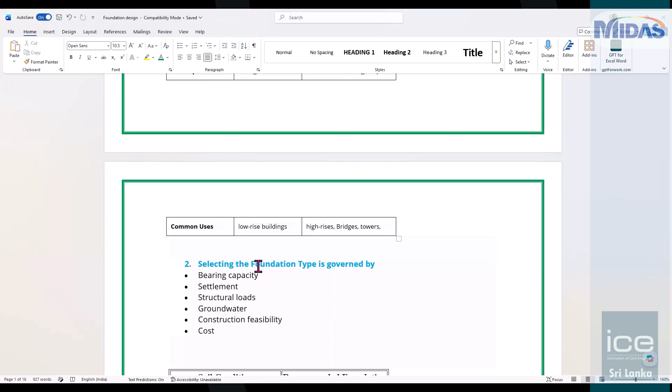Now, second part is selecting the foundation type. Which foundation do we need to select? Again, it depends upon the bearing capacity of the soil and the settlement criterias, the structural loads coming from the superstructure, the presence of the groundwater level, construction feasibility, as well as the cost. All these parameters govern selecting the foundation type.

Based upon the soil conditions, if you're having high soil bearing capacity and low settlement criteria, we can happily go with isolated foundations. If our two columns are very closely spaced such that the isolated foundations are overlapping, we can go with combined foundations. If you're having low soil bearing capacity with many columns, raft foundation will be the suitable option. If you're having weak upper soil layers, we go for pile foundations or the bored pile foundation. And if you're having heavy structures or high-rise buildings, we go for pile raft foundation.

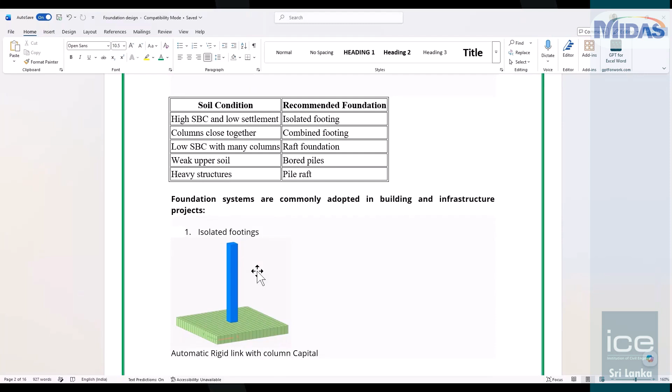So when it comes to the foundation systems commonly adopted in buildings and infrastructure projects, we basically start with isolated foundations. For isolated foundations, we can model them separately, or we can also model them in the global structure.

So now, what is the advantage we can get when we model the foundations in the global structure? You can just type in the chat box. Do we have any advantages when we model the foundations along with the superstructure?

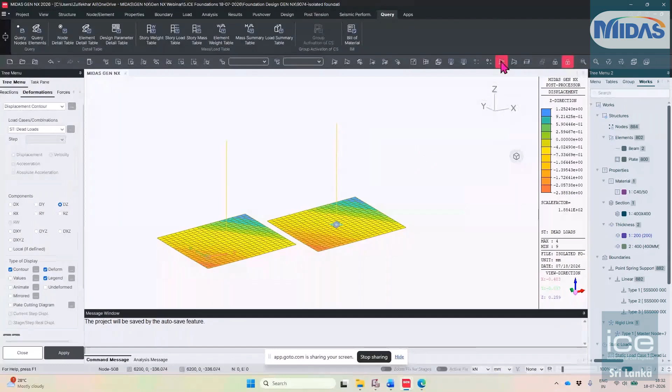So this is one example of isolated foundations that we have modeled. Basically in engineering practice, we model the supports, do the analysis of the structure, extract the reactions, and then design the foundation separately. But what is actually happening at the site, or the practical scenario, when your building is resting on the foundations? If you see this particular structure, you have a column and below that it is modeled as an isolated foundation.

One thing is we give the real soil flexibility under the structure. In the boundary conditions, we have different types of support conditions. Generally we provide pin support or fixed supports at the bottom of the column, which will give zero deformation at the bottom after the analysis.

But when we model the shell element as an isolated foundation, we apply surface springs. In surface springs, we can provide the modulus of subgrade reaction in all three directions. There will be certain resistance for the soil in the vertical direction by compression behavior, and some resistance in the lateral directions, global X and global Y. So we can enter the modulus of subgrade reactions provided in the geotechnical report in all three directions and apply it to this particular foundation.

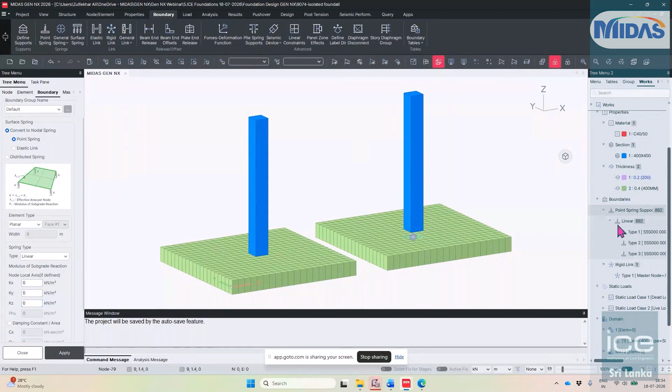Where these points can be seen here. So now, after running the analysis, when you go to the results and check the displacement contour for any load case along the vertical direction DZ, along with the deformed shape and the values, I'll just undisplay these supports.

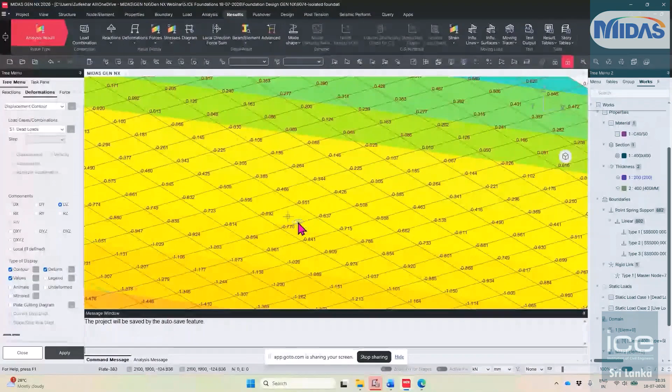And now I can change the units dynamically here to mm. Now I can see the deformation or displacement contour at the bottom of the column, which is around 0.692 mm. Here it is a single column and the load applied is also very low intensity. But when it comes to the building, your axial loads and moments will be higher, which will increase the magnitude of this deformation at the bottom of the column.

But when we give the pin supports or fixed supports, it will show us zero deformation. But actually, there is a deformation happening at the bottom of the column, which we ignore by modeling the point pin support. So what happens here is you'll be getting some additional forces and moments due to settlements happening in the foundation. That effect can be captured when you model the foundation along with the superstructure. So this is the first advantage of modeling the foundations along with the superstructure in the same model file.

Second thing is you can also check the stability criteria. Whenever we are doing the foundations, we have soil bearing checks, overturning or uplift checks, and sliding checks. When we apply these surface springs, we can also see the soil pressure, the vertical pressure, and the legend. So I can just change this to fixed format here, and change the units to kilonewton per meter square.

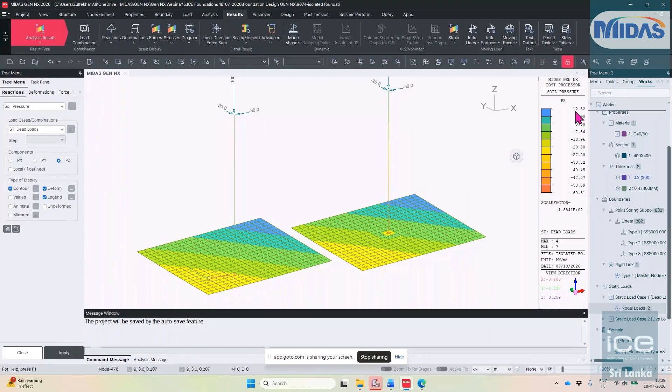The second thing is whenever we are modeling foundations, your columns are modeled as line elements and foundations are modeled as plate elements. So when your line element is directly contacted to the plate element, you get more stress concentration, which gives a large amount of reinforcement at the connection region. But in reality, this part of the foundation is completely rigid - the column and foundation are completely rigid.

So in order to avoid that huge stress concentration, we can model a rigid link based upon the size of the column. This can be done easily in the software with the help of column capital.

If you go to the node and element tab, there you can find different options like drop panels and column capitals. First we can define a column capital, which is having the size of the column, let's say 0.4 by 0.4.

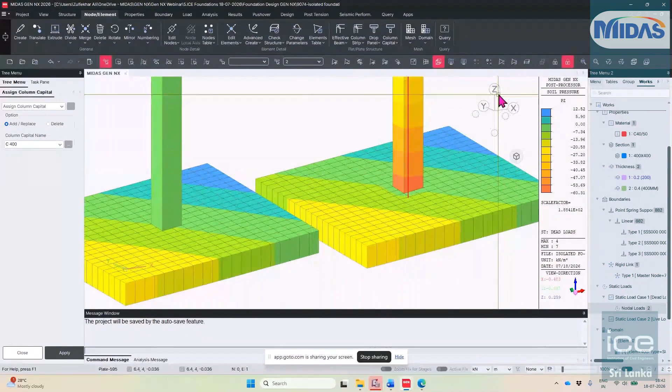Now you can see after meshing, the software will create the rigid link based upon the size of the column - this entire part is treated as rigid. Now let's see how it impacts the analysis results. After performing the analysis, I will go to the results and check the plate forces and moments.

Here we can select the load cases, static load cases, as well as dead loads and live loads. We can also smoothen the forces by selecting the average nodal method, where we take the average of the connected elements at a common node.

Mxx is the moment along the local x-axis. We can display the element local axis and the label - so this is our local x direction, and mxx is moment along the local x. We scroll down, don't want the deformed shape and legend, and just hit apply.

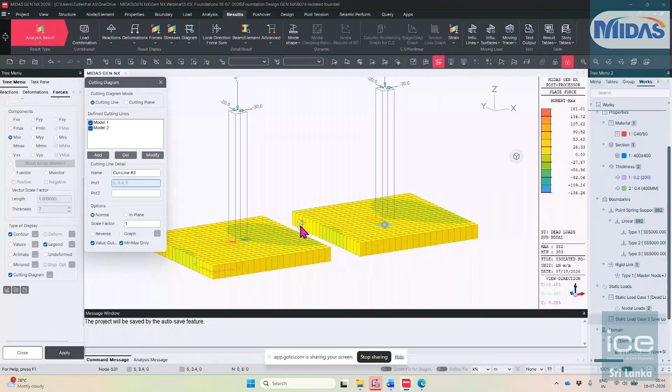So now here you can see the difference in results when you model the column directly connecting to the plate elements versus with the help of rigid link. This is the moment at the face of the column - that is 51.6 kilonewton meter per meter, and here is the peak moment at 161.8 kilonewton meter per meter. So that is where we observe the peak moments when we model the line elements directly in contact with the plate element.

So it is good practice to model a rigid zone below the column, wherever it is, at least the cross-sectional area which has that particular rigid link. Manually creating those rigid links is a complex job, but in MIDAS Gen you can do it very easily just by defining the column capitals and automation, so you will be getting lesser reinforcement in the foundation.

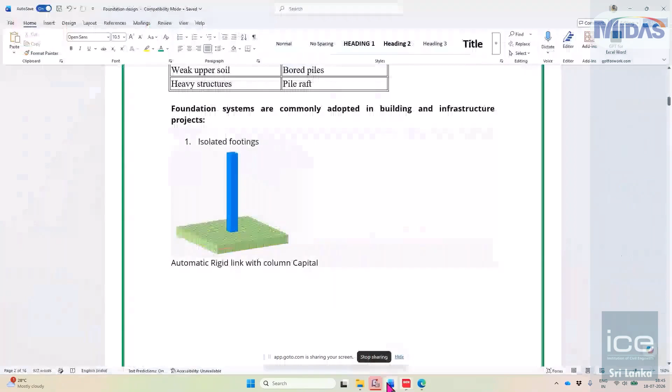So these are the few things when we come with the foundations in a single model file. We can see the global behavior, and the second thing is automatic rigid links with the help of column capital, which will reduce the peak moment.

So before modeling the shell elements, now the question is how to decide the size of the foundation. There are many columns in a building, so how to decide the size of the foundation? Just type in the chat box.

Am I audible? And am I audible? Yes, sir. Okay, so I have one question for the attendees: how are you going to decide the

size of the foundations before modeling it as a shell element. So few may do manual calculations using the Excel sheet by exporting all the reactions to the Excel sheet, which is again a time consuming process. Yes, based upon the load and the SBC. So we export all the loads to the Excel sheet and make sure that the stress criteria is satisfied. And from there, we also consider the bearing capacity of the soil, and then we finalize the size of the footing.

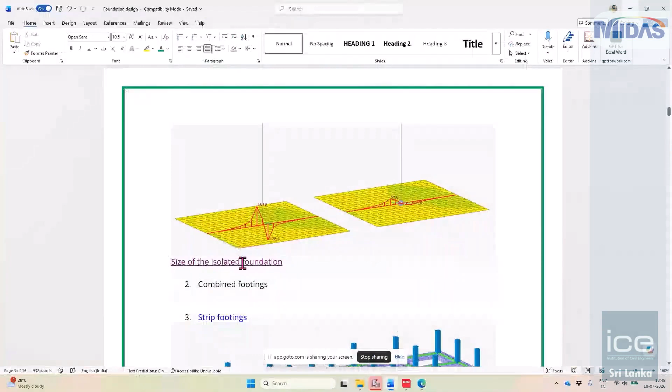So basically, in the software, we can do the superstructure as well as the substructure in the same model file, and we can also automatically generate the load combinations, or we can also replace the existing load combinations if there are any modifications in the load cases. So generating the load combinations is automatic in the software.

And now we can see a part of the building is on pile raft foundations and part of the building is on the isolated foundation. So I want to know what are the sizes of the foundations based upon the load and the soil bearing capacity. So in MIDAS Gen, we have an interesting tool called Design Plus, where it will help us in providing the sizing of the RC members, either it may be beam, column, or the foundation.

So we can link with MIDAS Gen and extract all the reactions required for the design. We can link these to Gen and import all the data, either it can be isolated footing or combined footing. And here we can also select by maximum or individual members, and for load combination type, we can select all the load combinations and force type as reactions of the support.

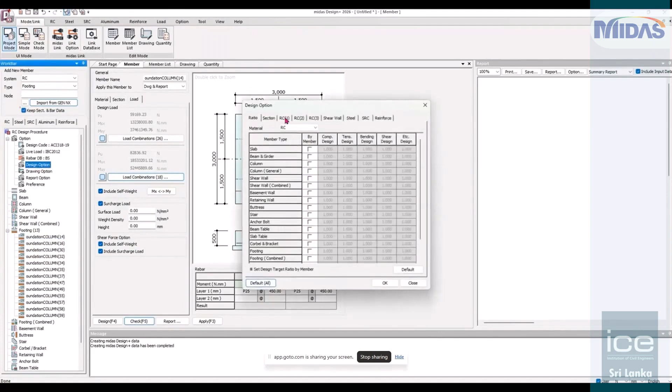So here you can see strength and serviceability load combinations, and we can also include some additional surcharge load. Here we can also restrict the maximum thickness of the foundation required for the design, and we can also set the rebar limits as well, so what should be the range of my rebar for the footing. And we can also specify the spacing of the rebars required for the movement.

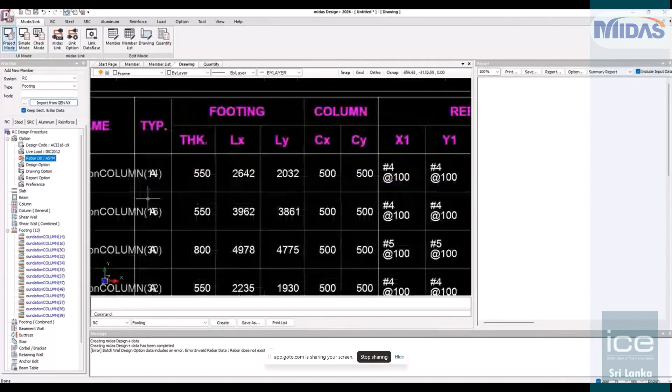So here we can find both the options, design and check, and if you want to design all the foundations, we can design in a single go. So before doing the design, we can make sure of the soil bearing capacity. By default, it will be 3 meters by 3 meters, but now you can see the optimum size of the footing required based upon the loads and the bearing capacity.

So you can also generate the drawings for the footings and extract the quantity of the steel as well as the concrete for the foundations. So this is how the Design Plus tool helps in providing the sizing of the foundation, generating the drawings, and the quantity of the steel and concrete. And another interesting part is you can extract the report in the detailed format.

So here we can see the reports can be either in detailed format in Word document or Excel or the text file.

Similarly, based upon the Eurocode, we can also do the strip foundation designs, combined foundation designs in Design Plus based upon the empirical calculations.

And for detailed finite element designs, we can model it as a shell element and do the design in the software. We have a mesh design feature where we can select the Eurocode, and here we can do the slab flexure design, shear design, and serviceability checks.

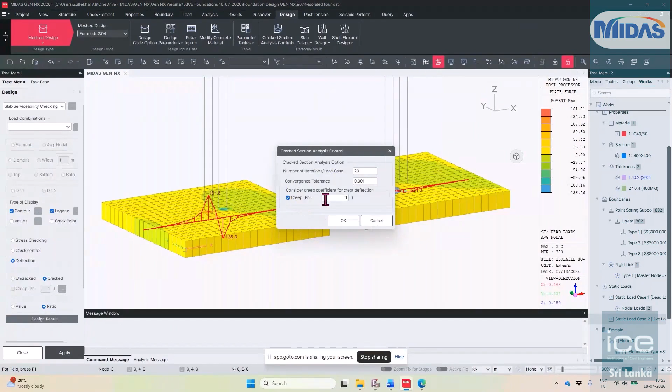So this is how you can do the detailed designs for the isolated foundations once you get the sizing of the foundation. Design Plus makes our job easier in the foundation design.

Next one is the combined footings. The same concept of the foundations is similar now, like boundary conditions. In combined footings, footings are combined with each other.

So here we can see these are the combined footings which are modeled, where you have two columns and the foundations.

We can also do the foundation designs in Design Plus as well, based upon the empirical methods or the procedure given in the code.

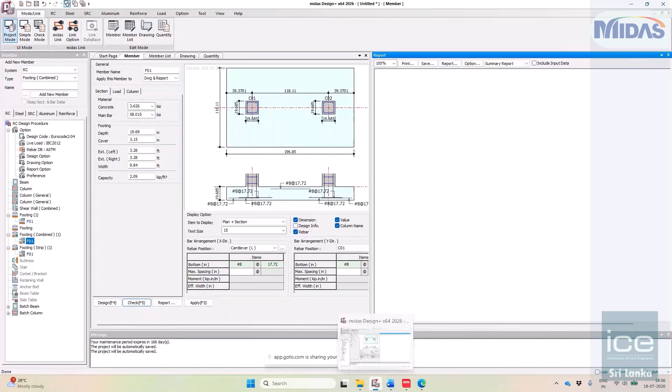Next one is the strip foundations. Sometimes along with the foundations, we also need to strengthen with the help of beams, additional beams. So in the software, we can also model the strip foundations in the global model.

So when I activate it all, this is my global model where I can model the strip foundations and see the realistic behavior of the structure and additional strength due to these particular beams.

So when these foundations are not satisfying the criteria, we start with isolated, then we go for combined strip, and then we go for the raft foundation.

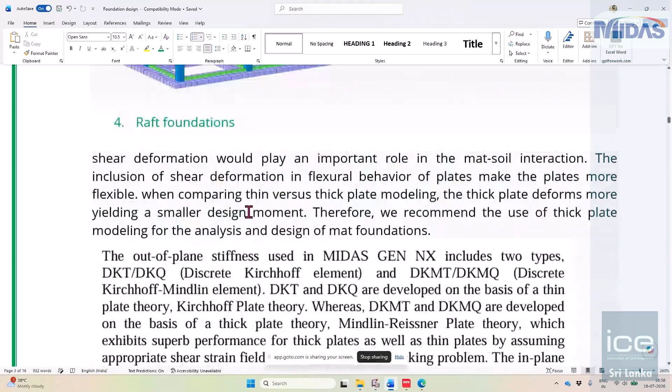So whenever it is coming to the raft foundations, there are few interesting things. First is the shear deformation.

Shear deformation plays an important role in soil structure interaction, particularly the mat soil interaction. Generally we ignore the shear deformations, but shear deformations play a major role in the flexure behavior of the plate, which makes the plates more flexible.

So when your structure is flexible, the moment and force demand will be lesser. But when it comes to the serviceability point of view, the deflections will be higher. So we need to balance both things.

So when comparing thin versus thick plate modeling, thick plate deforms more, yielding a smaller design moment. So therefore, generally we recommend using the thick plate modeling for the analysis and design of the mat foundation.

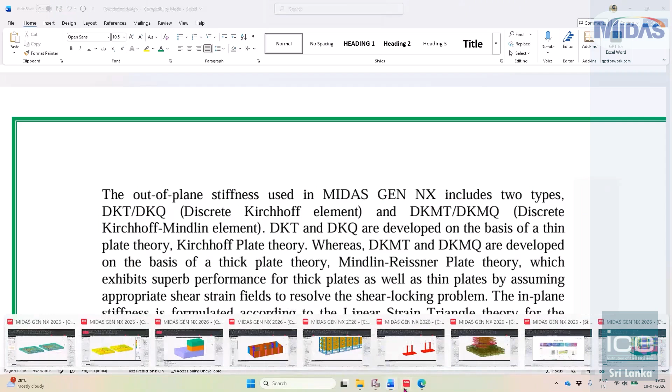So in order to avoid these peak moments, we generally use column capitals for creating the rigid link. Otherwise, at this location, we will be getting higher reinforcement.

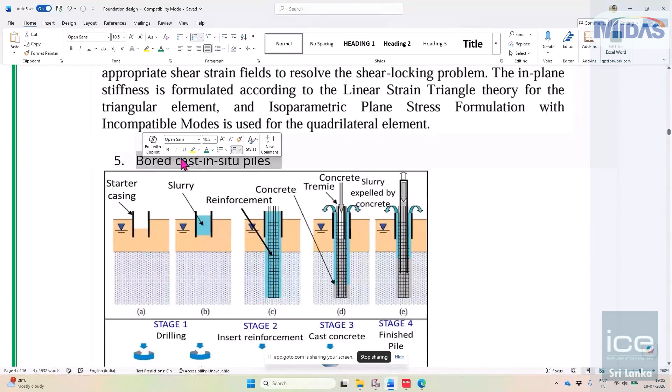So if the raft foundation still isn't solving our concern, then we go for the pile foundations. The pile foundations will depend upon different construction sequences.

We can drill it and then insert the reinforcement cage and then pour the concrete. But every construction method has its own advantages and disadvantages.

So when you drill this particular pile and insert the reinforcement cage, there may be a chance of collapse of the soil and concrete, and there will not be complete compaction or bond between the reinforcement and the concrete.

So in that case, we go for the driven piles or precast piles. The advantage of these precast driven piles is that we have high quality concrete due to controlled manufacturing, and we get immediate load carrying capacity after the installation.

So we need not wait for the concrete to gain complete strength or for curing. And there is no risk of borehole collapse.

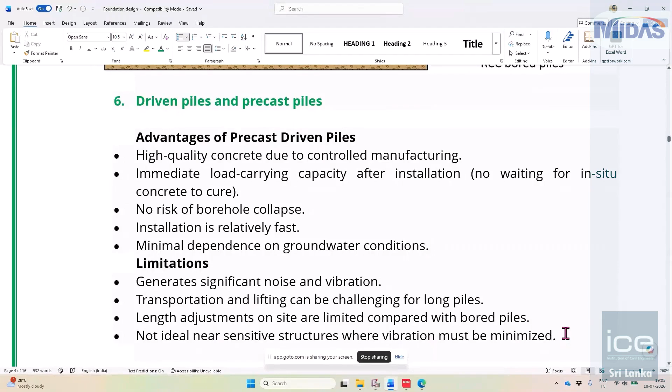So now these piles are combined with a raft, either as isolated pile cap foundations or pile raft foundations.

But whenever you create pile foundations, along the depth of the pile there are different soil layers, either lower density, medium density, or higher density soil. So we need to perform the borehole test and extract the soil data along the depth of the pile, and based upon that, calculate the stiffness of the soil.

As we know, soil has non-linear behavior, so along with the deformation, the stiffness will gradually reduce. Either we can provide equivalent linear stiffness, or model it as a force deformation function using the PY curves. So the boundary conditions for the piles will be these force deformation functions, which we need to calculate.

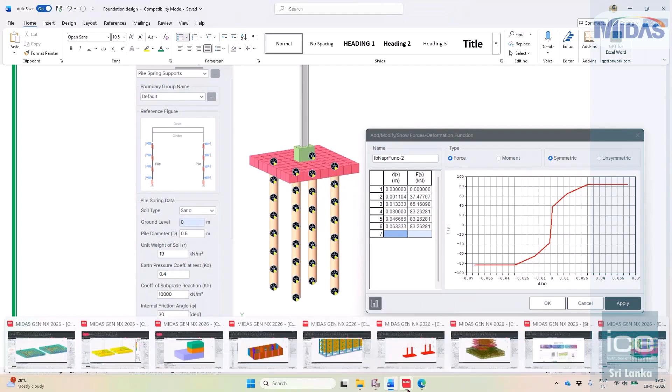So in the software, we have a direct option of providing the pile spring support where we can just input the geotechnical data, like what type of soil is available at the site. So when we go to the boundary conditions...

Here we can find the pile spring supports where you can select the soil type, whether sand, soft clay, or stiff clay, and the ground level of the pile, the pile diameter, and the unit weight of the soil present at this particular location.

And if I see from the side view, along the depth of the pile the properties may change. As you can see in this diagram, up to this part of the pile you have lower density, and again this part of the pile you have medium density.

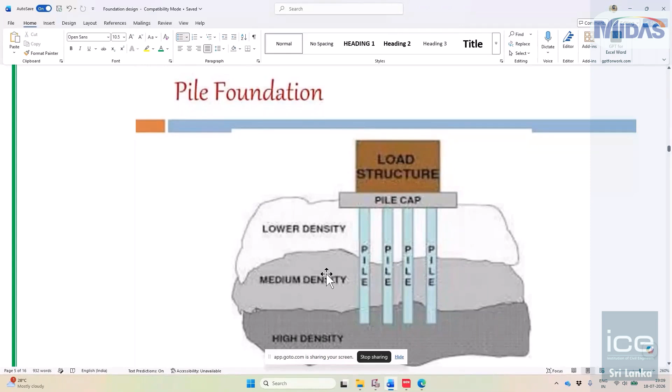So what we can do is select piles which have the same soil properties and assign the spring. Then you can change the parameters here, select the other layer of pile elements, and apply. Once applied, you can see all the inputs in the tree menu.

So again, this is an iterative method. First we assign some springs, then we run the analysis, check the results, and make modifications to the springs until the results converge.

So this we can do with the help of empirical calculation. For example, we have our own set of calculations for finding the PY curves. So instead of defining these functions one by one, going to the force deformation functions and adding them manually, we can automate the process with the help of API.

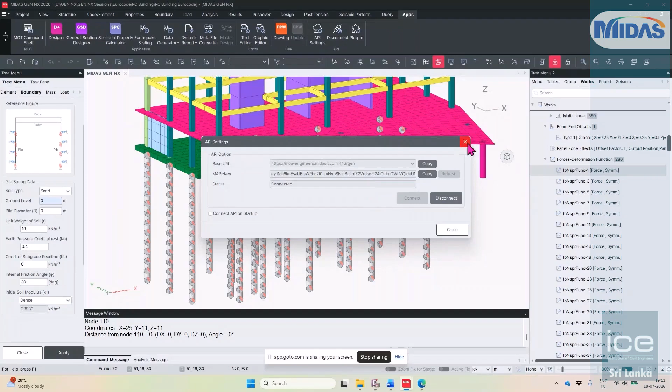So for that, we have developed a tool which is PY Curves Automated.

So what exactly this tool does is, let's say we have a building with the pile caps that are already created, and now we need to create the pile and apply the springs. So here we can directly input or link all the PY curves in the Excel sheet for the force deformation functions, and we can have the reference nodes here for the piles, and we can specify the reference node, the metadata, and the section IDs.

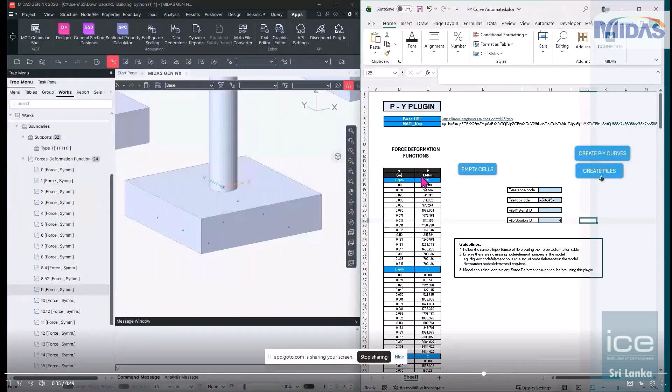So here you can see the workspace menu. In the boundary conditions, right now we have only the support. So once I click on create PY curve, it will create all the force deformation functions as per the data given in the Excel sheet. And once I hit on create piles, it will create the piles and apply the multilinear springs. So this is how we can make things faster with the help of API.

So automation will make our work simpler. Till now we have seen line modeling as well as the plate elements. But when you go for heavy foundations like machine foundations or very deep rafts, in that case we use solid elements for the modeling. Like machine foundations or raft foundations which are having very huge thickness, we generally use the solid elements.

But whenever we model the solid elements, how will we extract the forces? So my question is, when we model the solid elements, how do we extract the forces? Like, if you are modeling the solid elements, how to extract the forces.

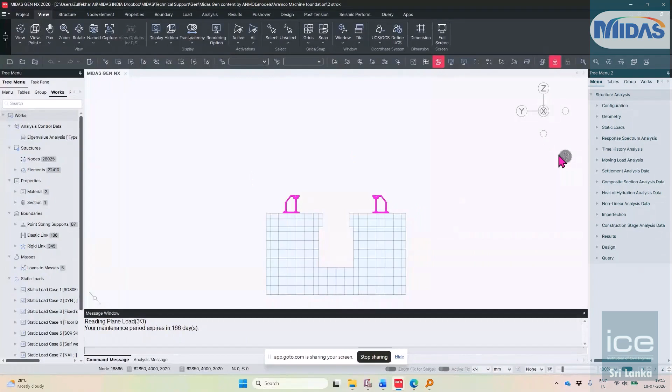So let's say this is one example of a machine foundation where you'll have the solid, and you can also see the depth of these particular foundations with the help of the query nodes option, which is 4.5 meters. And the length of this foundation is around 141 meters.

And here we will perform the dynamic analysis for the check of the foundations. So here we will be having the heavy machine foundations and apply the dynamic nodal loads onto that particular foundation. And the time forcing functions will be periodic, reaching a maximum amplitude of 8,000 kilonewtons.

So after performing the analysis, we can see the stresses for the solid elements, whether the tensile stresses and compressive stresses are within the permissible limit or not. So this is one check, and the other is extracting the forces and moments for the solid elements, which can be done with the help of local direction force sum.

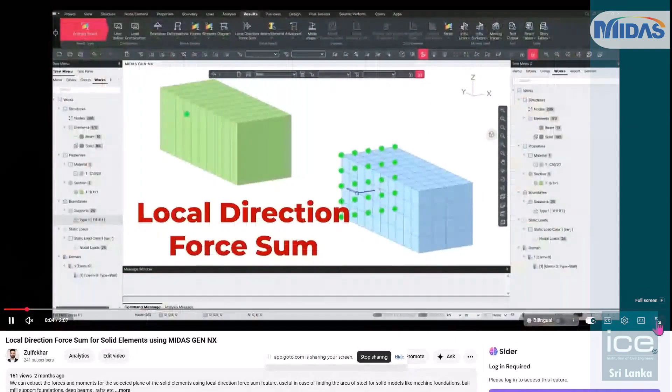So here we have modeled two different elements. One is the line element and the other is the solid element. This is a simple cantilever beam just to verify the results, which is subjected to a nodal load at the free end. Because of that load, we are getting a moment of 625 kilonewton meter and a shear force of 250 kilonewton.

So whenever we model the same thing as a solid element and we want to extract the force and moments, we can use this local direction force sum feature for the solid elements. In the results, you can find this local direction force sum, select the type of element as solid, and cut a section where exactly we want to see the forces.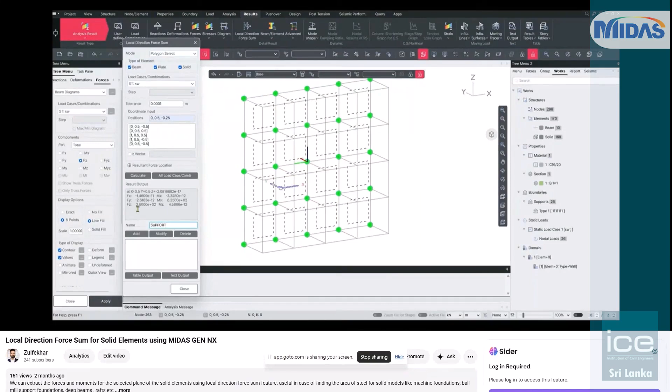So we can directly see the results here, or we can also give a name to that particular section and extract the results in tabular format. So I have given the name as support and extracted the results in the table for all the load cases or combinations.

So now you can see we are getting the same forces and moments that we got for a line element, with a moment of 625 kilonewton meter. So this is how we can extract the forces in solid elements when we are dealing with solid foundations which are having large depths.

So another challenge that we get when modeling such deep foundations is the heat of hydration. You know that concrete follows an exothermic reaction where it releases heat when it is gaining strength.

So if you see these particular foundations, the outer surface is exposed to the temperature atmosphere, so it will release the heat very easily. But if you go to the inner parts of this particular block foundation, it will generate additional stresses. So once the stresses are increased, it will try to generate cracks.

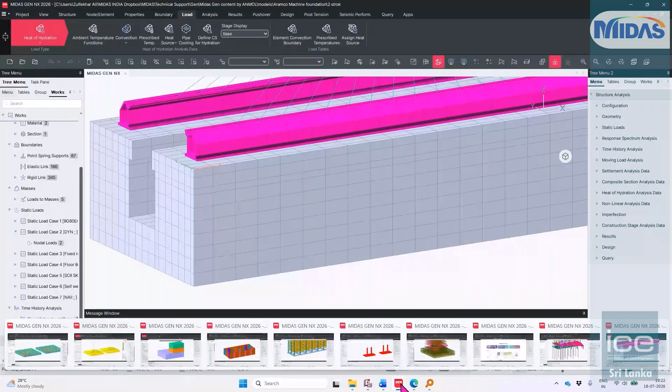Let me show you one simple example of the foundation. This foundation is completely modeled as a solid, and we have two different materials: one is the mat foundation, and the other is the subsoil. For subsoil, we have given the soil properties, and for the mat, we have provided the concrete properties. And then we include the time-dependent material properties.

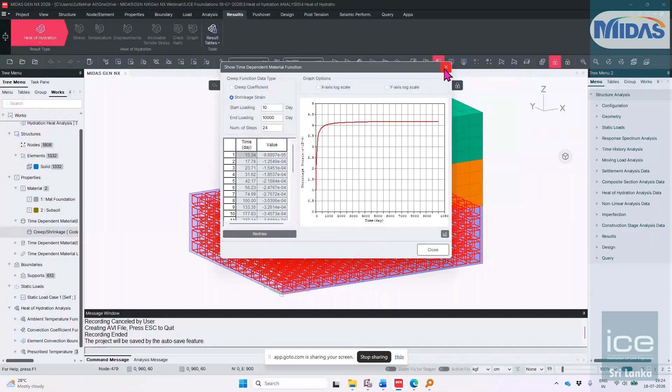So here you can select the code, like European code, and define properties like characteristic compressive strength and notional size, class of cement that you are using, and code. Based upon that, the software will calculate the creep coefficient variation with respect to time and the shrinkage strain variation with respect to time. So these are the few important things that we need to consider when dealing with concrete structures: the creep and shrinkage effects, and the elasticity variation with respect to time.

Then we apply the boundary conditions. So here we'll be having the entire soil, and then we provide the ambient temperature - what is the normal temperature. And then we have the convection coefficients, based upon the exposure of this particular concrete, how much heat it can release. Based upon that, we provide the boundaries.

So if I display these convection boundaries, so here it is, open to the atmosphere.

And then we will be having the heat source functions, like how heat is generated in the concrete with respect to time. So we have a function with respect to time, which is a function of maximum adiabatic temperature and reactive velocity coefficient. Sometimes these heat source functions may change based upon the concrete data we're using - based upon the cement type, moderate or high early strength, blast furnace or fly ash, and the temperature, and based upon the cement content, the graph of the heat source function will vary. So the complete results will depend upon how the heat source is developed.

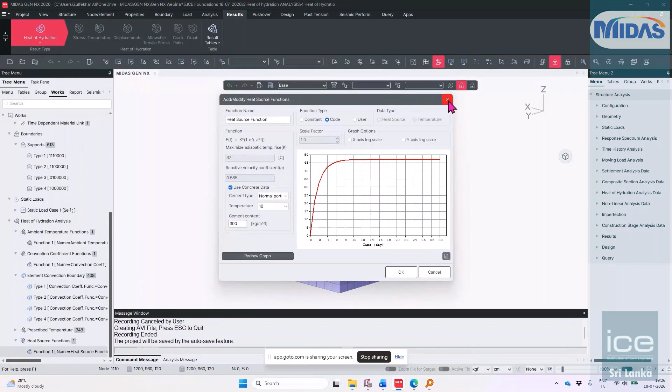And these particular blocks represent pouring of the concrete taken in different stages. So let's say in the first stage, only this part of the concrete is poured, and then we take a break, and then a second pour of concrete takes place. So this is how the sequence of pouring concrete can be simulated in the software.

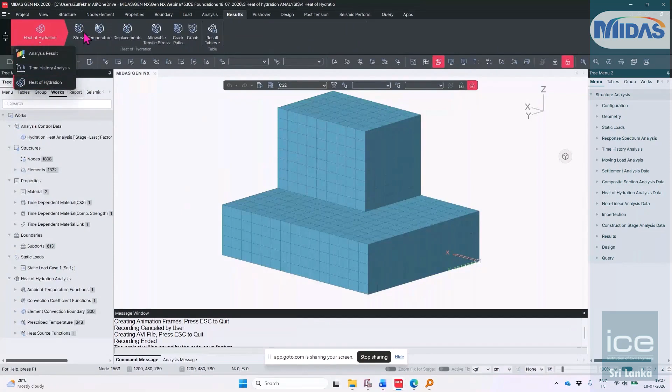And after performing the analysis, we can see all the heat of hydration related results, like how the stresses are developed in the concrete with respect to time. I can see the stresses - so here it is, 1.48. A positive value represents tensile stresses, and a negative value represents compressive stresses.

So if these stress values increase beyond the permissible limit, then cracks will be developed. After 200 hours, the stress is 1.64, and after 220 hours, it is 1.88. So the stress value is gradually increasing - 2.06, 2.02. After a certain peak, the stresses will come back to normal - it will go to the peak level and then try to reduce. So we need to make sure that at that particular peak level, our concrete is safe from cracking.

And you can also see the temperature variation. So you can see the temperature is varying till 52 degrees Celsius, and after 1100 hours, it has gradually reduced to 36. And we can see the allowable tensile stresses and the crack ratios in the structure.

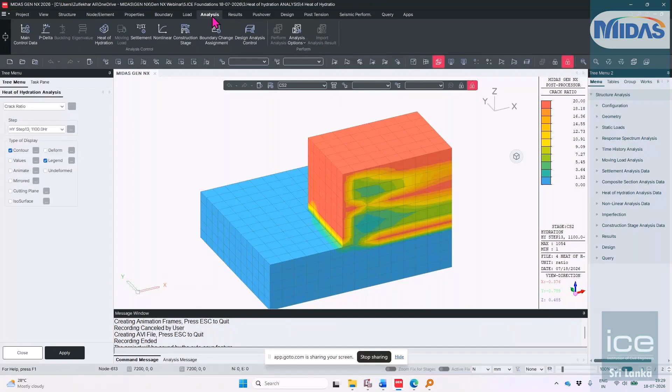So this is one of the important analyses that can be easily handled in Gen NX when you have a mass concreting structure - either raft foundations, wind turbine foundations, or machine foundations. So that can be easily handled with the help of heat of hydration analysis.

So another challenge that we face is related to soil structure interaction. The procedure that we have seen previously is completely based upon empirical methods, finding the P-Y curves and updating the P-Y curves in the model.

But when it comes to the important structures, the realistic approach is by performing the 3D geotechnical analysis by creating the soil in a 3D continuum model.

So if you see here, this particular structure is analyzed and designed by assuming certain springs. Initially, we assume certain force deformation functions, and then we model the exact 3D soil model in the geotechnical software.

So we have geotechnical analysis software known as MIDAS GTS-NX, which is known for advanced geotechnical analysis like soil structure interactions, deep excavations, tunnels, etc. So today we'll focus on the soil structure interaction application, and we have a powerful link with the geotechnical software.

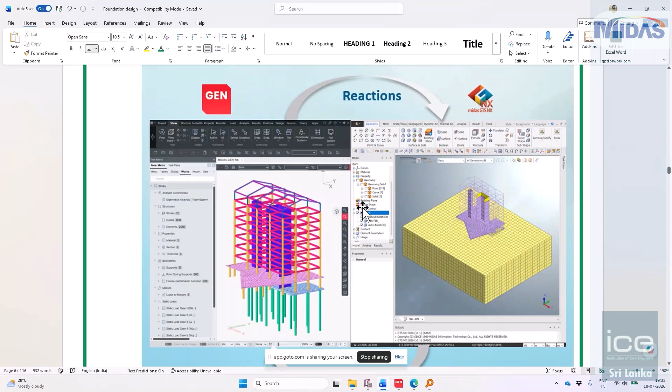But doing this manually is again a little bit time consuming, because we need to wait till the analysis has been done and then export it. So instead of that, we have tried to automate this iterative process with the help of the NX Interact plugin.

So that plugin will automate the process. So even if we don't have the geotechnical software, we can also connect with other clients who have this particular geotechnical tool, and we can do the iterative analysis.

So I will show you a simple example. Before that, these are a few real projects where the soil structure interaction has been done for a high-rise building.

So the global model is done in Gen NX, and in GTS we have modeled the soil based upon the exact profiles. As you can see, the soil is varying along the length and the width of the formation. So this is to handle the soil structure interaction.

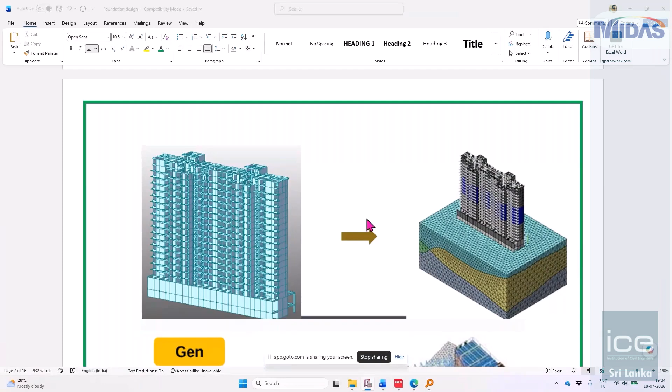So if you see this particular image, there is one more additional challenge. There is already an existing building, and below the existing building there is some tunnel construction.

So now we want to perform the risk assessment for this particular building during the tunnel construction. So here, in the geotechnical analysis software, you can capture the effect on the superstructure because of the tunnel construction.

So another challenge that we frequently face is construction of buildings adjacent to tall structures. So when we do deep excavations, we need to see the behavior of the adjacent structure as well. Such types of challenges can be easily handled by MIDAS GTS NX in combination with MIDAS Gen NX.

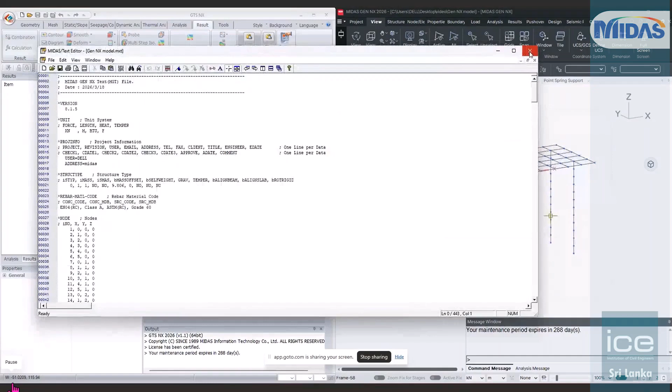So this MXT file will export the geometry of the structure, and we can easily import that structure into the geotechnical software. So this will save a lot of time in creating the model from scratch.

So now you can see the entire model has been imported. And then we just quickly create the soil model by defining the properties of that particular soil. So we have some advanced tools for creating the geometry and meshing. We define the soil properties of Mohr-Coulomb, and we have different material models that are readily available.

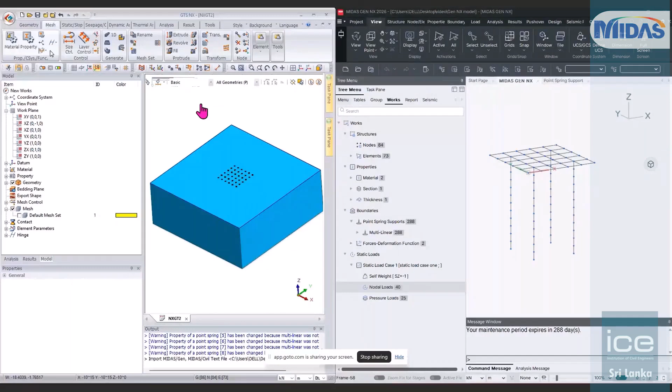And we can also simulate the groundwater level. It also does automatic meshing and applies the boundary conditions. And we perform the analysis to check the soil stiffness and settlement.

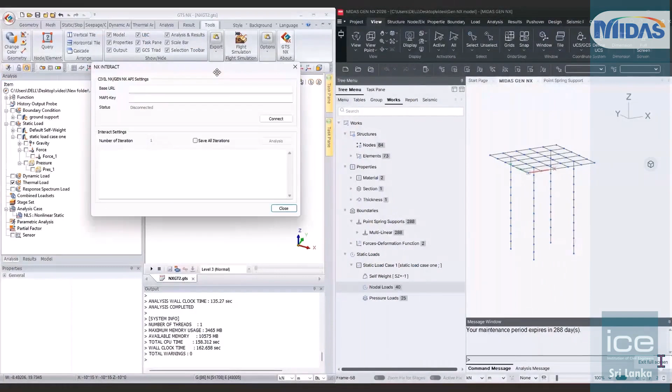So now we get the results related to the settlements. With the help of NX Interact, we can link the Gen software with the help of API. So even if the programs are installed on different computers, you can easily exchange the data. Let's say you have the geotechnical software and I have the structural software GenNX. I can share my MAPI key with you so that you can input the MAPI key in the NX Interact.

You can directly connect the models. So first it will run the analysis in the GTS NX, and then it will send the data to the GenNX automatically with the help of API, and there it will run the analysis and bring the updated nodal results. Based upon the number of iterations we specify, it will do the iteration, so we don't need to worry about when the analysis will be completed or exporting and exchanging the files. You can just put it for analysis and relax.

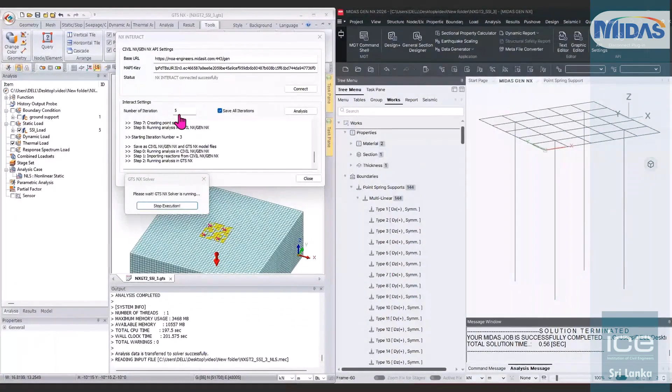Now let us see the practical example using MIDAS Gen NX and GTS NX, especially for the pile raft foundation. This is one of the upcoming tallest towers in the world, Jeddah Tower in Saudi Arabia. The height of the structure is around 1 kilometer, and the structural analysis is done using MIDAS Gen NX by Thornton Tomasetti. You can see the different construction stages for this particular high-rise building.

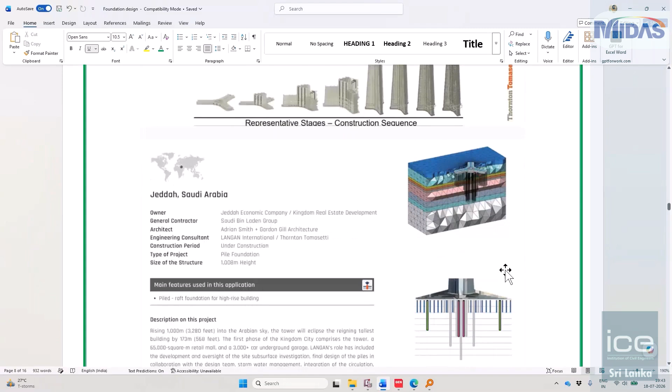When it comes to the foundations, this structure has a pile raft foundation, done using MIDAS GTS NX. The engineering consultant was Langan International for the geotechnical analysis, and Thornton Tomasetti for the structural analysis of the superstructure. It is still under construction, with pile raft foundations, and the height of the structure is 1008 meters. This is the upcoming tallest tower, taller than the Burj Khalifa.

So in this particular project, both the softwares are utilized, Gen as well as GTS. Gen for the column shortening analysis of the tall building, and GTS-NX for the foundation raft analysis. You can see the different soil models.

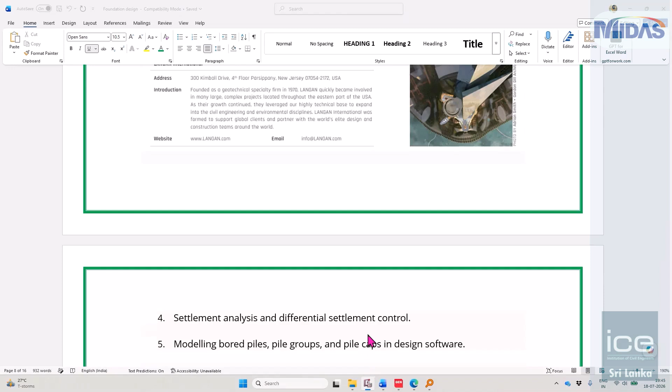So next is the settlement analysis. Settlement is another challenge in the structure. The Leaning Tower of Pisa is one structure affected by differential settlement. To capture the settlements, you need to model the soil as well as the superstructure. Because of the settlements, you also generate some additional forces and moments in the structure. This is one approach to do the detailed settlement analysis, and another approach is we can apply the settlement values directly to the column locations.

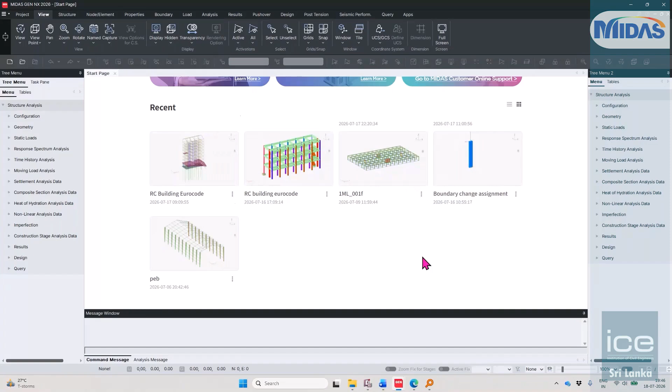So let me just open the model. Yes, audible. My screen is visible, right? Yes, sir, yes, it is easy.

So let's say this is my superstructure where I know the settlement values. We can go to the loads, then to settlement, and specify the settlement group. Here you can select all the nodes of the columns which are having the same settlement. Let's say the highlighted nodes are undergoing 10 mm deformation, and similarly different columns undergo different settlements, so based upon that we can create the groups.

We can also create some load cases where we can capture different effects, like when two different groups settle simultaneously, by doing some permutations and combinations. In this way we can capture the settlement behavior and perform the settlement analysis by providing the settlements at different columns.

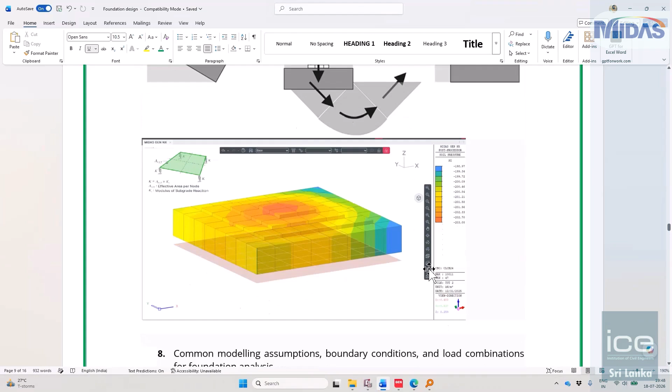So again, we need to check that the structure is safe in stability, bearing, and sliding. We already saw that our structure is complete in compression, or if there is any uplift, or if these values exceed the soil bearing capacity. For the foundations, we refer to Eurocode 1997 for the geotechnical design part. This we already saw in the previous webinar, for load calculations and the concrete design we refer to Eurocode 1992.

So this is where we have discussed about the heat of hydration analysis, where we can define the heat source functions for the concrete and the time-dependent material properties, and then heat transfer. So definition of the ambient temperatures and the heat, and temperature distribution based upon the construction or the pouring sequence. So from there, we can see how the temperature is varying during the construction and the stresses in the concrete.

So we can also use pipe cooling approach to reduce the crack and control of temperature for the use of ice plant by determining initial temperature for newly activated elements at the corresponding construction stages. And we also need to consider the various parameters for the accurate crack index analysis.

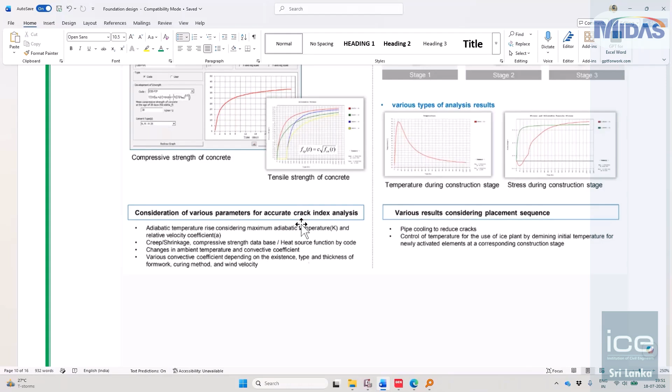So till now we have discussed much about the analysis part. Now the design. So again, design depends upon the behavior of the members.

So basically, when we see the foundations, mostly you'll be having the flexure behavior, where we can go for the design using the mesh design, and we can perform the slab flexural designs. So when we do the slab flexural design, the software will provide us what is the rebar required and area of steel in terms of mm² per meter. So based upon this area of steel, we can provide the reinforcement.

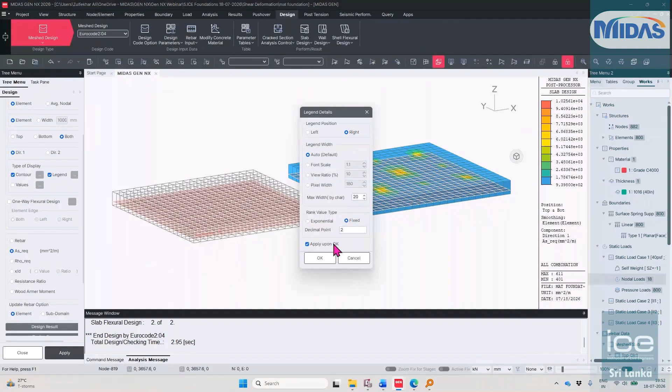So we can also reduce the uniformity here. We can go to the contours and we can customize the range. So at these locations, we will be having the nominal area, and at these particular locations, we will be having some higher area.

And the next interesting part is the Wood Armer moments. So whenever we check the results for the plate forces and moments, we just get the forces and moments per meter width. And again, we need to find what is the moment at the top and bottom in direction one and direction two. So that can be captured by the software. The software will automatically calculate the Wood Armer moments.

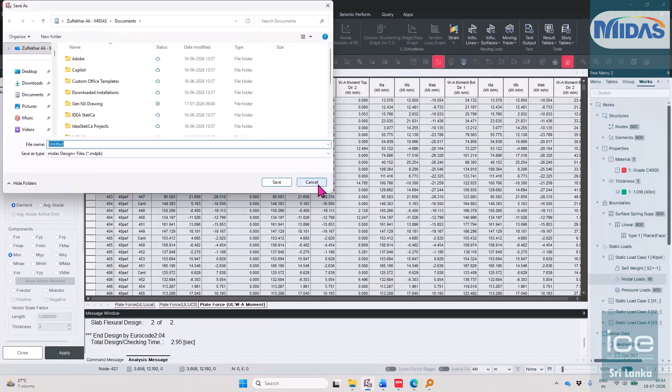So if we go to the Wood Armer moments, based upon the applied load, the software first will calculate the Wood Armer moment for the transformed axis. For example, if you're having circular foundations for tanks where you want to produce the radial reinforcement and the tangential reinforcement, in that case, we want to get the moments in that particular direction, radial as well as tangential, in the top and bottom. So whatever forces we are getting will be transferred into the transformed axis, and from there it will calculate the Wood Armer moment at the top and bottom, direction one and direction two.

And based upon the Wood Armer moment, the software will do the design. In the design, we have two options: one is design and checking. So in the checking, we can provide our own reinforcement in the rebar input. We can provide our own reinforcement pattern for the slab, mat, or walls and shells in top and bottom, direction 1 and direction 2, and we can check whether the provided reinforcement is safe or not.

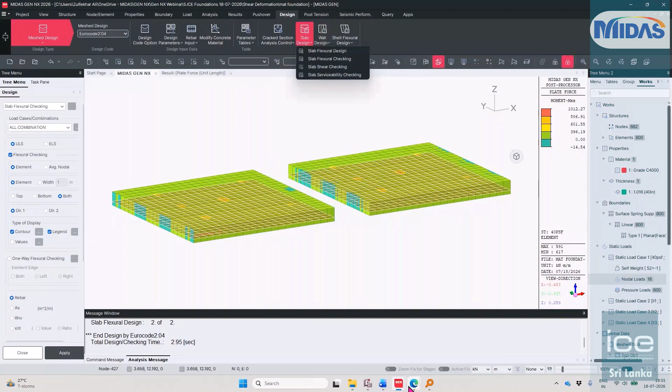And then we can see the shear checking, the punching shear checks. Here we can also select certain elements and we can do the design only for that particular member, instead of doing the design for the entire structure. I can just focus on certain elements.

And then we can do the punching shear checks. So here you can see the punching shear checks. So when the ratio is more than 1, then we can add some additional thickness at that particular point. That can be done very easily by providing drop panels at that particular column. If you want to increase the thickness only at certain parts, you can add drop panels of that size so that we can dynamically increase the thickness at that particular location, instead of increasing the thickness for the entire foundation. You can increase the thickness near the columns using these drop panels.

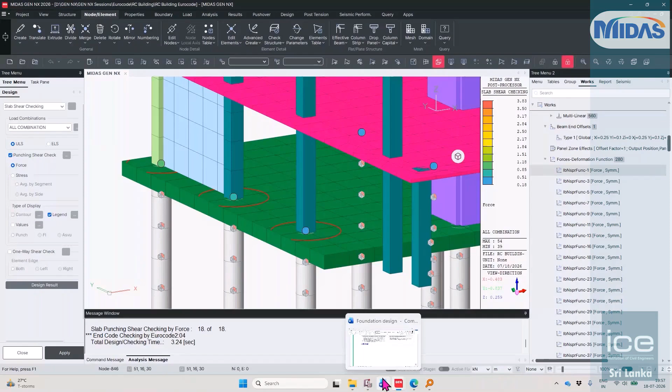So this will be satisfied when you're having the flexural behavior. So the next one is the wall designs. Let's say we have some vertical plate element where it will be taking the axial forces as well as the in-plane moments. In that case, we can use the wall design. And another thing is shell flexural designs, or the shell design. So let's see the behavior of the shell.

So basically, when you use the slab, it is governing in flexure, particularly out of plane bending. So when your plate element is governing by out of plane bending in flexure and shear, then slab design will be the correct approach.

But if your flexure is governing in plane, in plane shear, and axial, in that case meshed wall design will be the correct approach. But if you want to capture both in plane as well as out of plane...

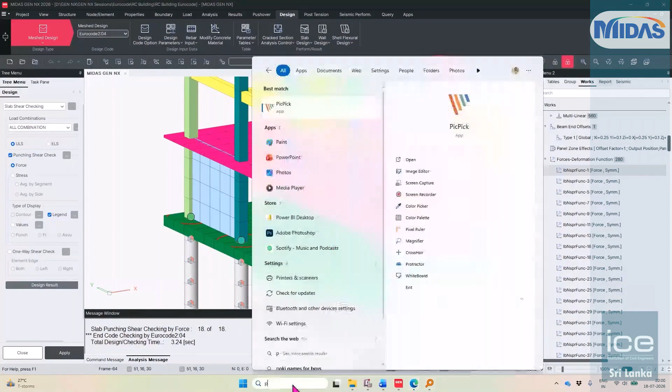So let's say we are having this plate element. Am I audible? Yes sir, okay. So when you are having a plate element, for example if it is horizontal, this plate will bend like this. So this is out of plane bending.

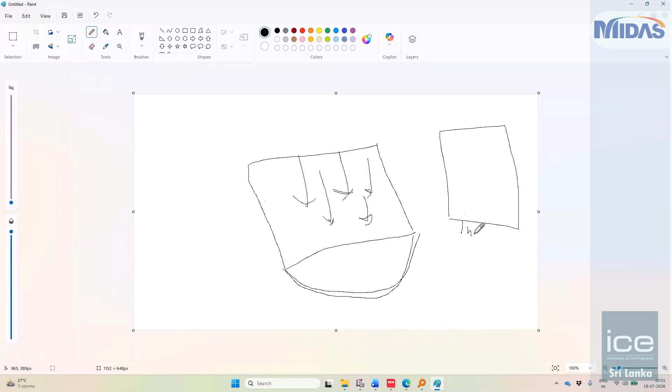This behavior happens when your load acts perpendicular to the plate. Another one is in plane. For example, if you're having a wall, a vertical wall, and you are having forces in this direction, these forces will create the in plane effects.

So when the loads are perpendicular to the plate, it creates out of plane effects. In shear walls, mostly you will be having lateral loads, and these lateral loads create the in plane effect. In slabs you will be having the vertical load, that is perpendicular load, which creates the out of plane effect.

So when it comes to buildings with retaining walls, you are having a retaining wall connected to the building, and that is connected to the slab. Because of this slab you will be getting some axial load, and because of lateral loads you will be getting the in plane effect, and here you will be having some earth pressure loadings.

This earth pressure will create the out of plane bending effect and the axial effect as well as the in plane effect. So retaining walls in buildings will have this behavior where axial is governing, out of plane is also governing, and lateral is also governing.

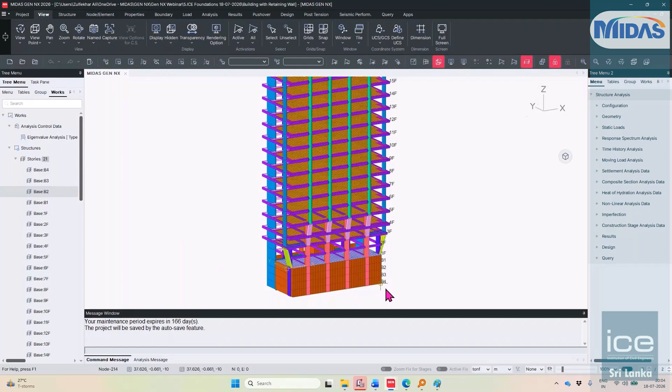So for that I want to show you one simple example of the building. This is the entire building model, and here till 4 basement levels you will be having the retaining walls, and then you have the columns and shear walls. If I just activate it, along the periphery you are having the walls, and in the intermediate you will be having the beams or the walls.

So for this you can just model it as a meshed plate element, so that you can do the shell design, and can connect with the other elements as well.

So this one you can model as a plate element, and you can create a mesh, and when you are creating the subdomain, you define that particular element as a wall element.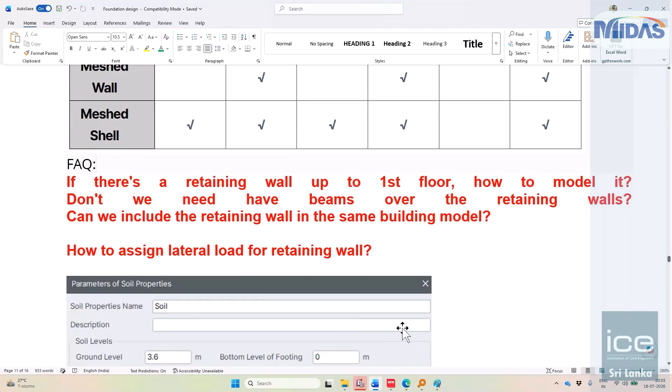And how to assign the lateral loads for these particular retaining walls. For lateral loads or earth pressure loads, we have an inbuilt function in the software.

So when we go to the loads, in the lateral loads, first we can define the parameters of the soil. Whatever type of soil it may be, you can define the angle of internal friction and the density, because your soil pressure will depend upon phi as well as gamma. So at different layers you can define the properties here.

So whatever elements fall in this range, let's say 3 to -15, the software will automatically apply the earth pressure.

So here you can define the different layers with the different properties for the soil friction angle and the density, and then we can assign the static earth pressures.

While defining the static earth pressure, you can select the load case names and the xy direction, whether you want to apply in the global x (0 degrees) or global y (90 degrees), or if it's an arbitrary direction you can select as normal to that plate.

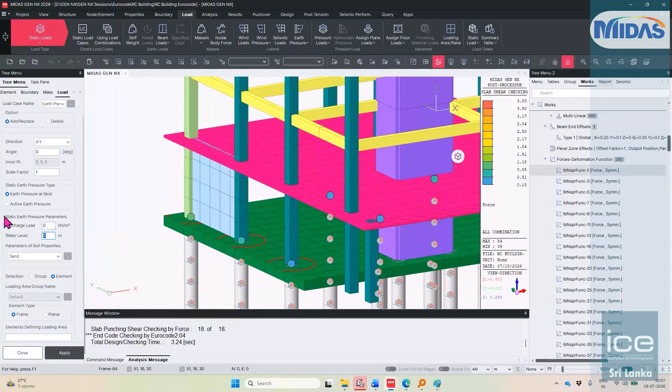If there is any additional surcharge load from live loads or dead loads, you can add it here. If there is any water level, you can add the water level and surcharge load, select the properties of that particular soil, and select the planar element to which you want to apply the earth pressure.

The software will automatically calculate the earth pressure along the specified depth, and we can also see the detailed calculation sheet. If you select at-rest, according to Jaky's formula, earth pressure at rest equals 1 minus sine phi, using the soil friction angle and soil density equation. This is the earth pressure equation considering water levels, soil surcharge, and so on.

So here you will get the soil pressure along the depth. With this function, the software automatically calculates the earth pressure and applies it on the plate elements, and you can also extract detailed calculation reports.

Here you can see the water level and the variation in earth pressure, and you can find the detailed calculation reports.

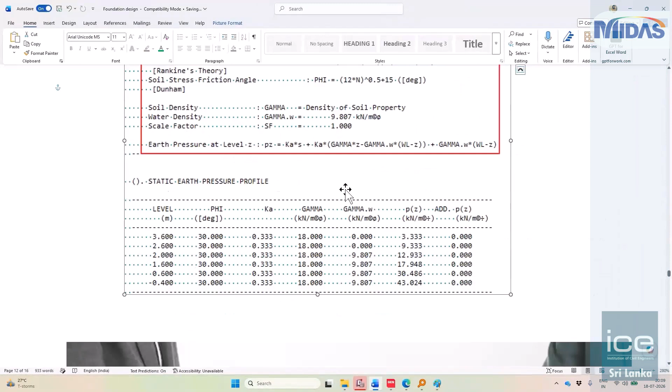This is how we can model different types of foundations in the software and perform mesh design. We can also consider crack section analysis for long-term and serviceability checks. As per Eurocode, we can do serviceability stress checks, crack control, and deflection checks.

We can also use the Design Plus tool for foundation designs. It can handle regular foundations or pile foundations where you specify the number of piles, and it can be an eccentric foundation in one direction or both directions.

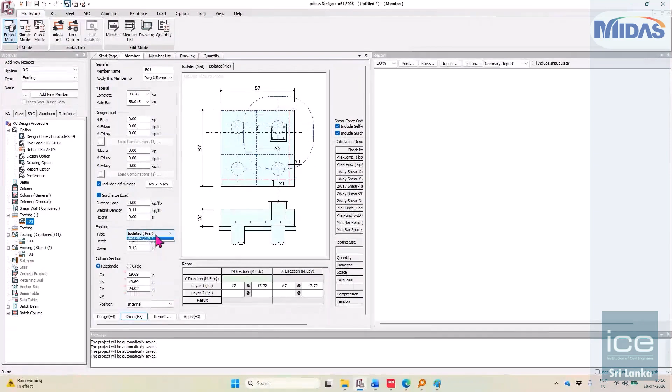Here we can do the designs as well as the checks, and we can also deal with combined foundations. You can provide load values directly imported from Gen NX, and you can also add the number of columns based on the requirement.

The combined footing can be with 2 columns, 3 columns, 4 columns, or you can add n number of columns.

We can also handle strip footings, either rectangular type strips or inverted T-type strips, with single rebar or double rebar. You can provide the soil bearing capacity here by changing units in terms of kilonewton per meter square, along with splicing data.

We can input the forces, or link with Gen NX and import the forces here. This is one example of performing strip footing design using Design Plus.

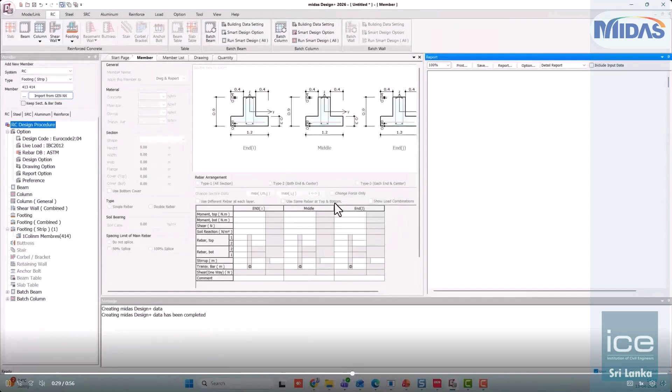We can do the design as well as the checks. On the right you can see the detailed calculation reports, and we can also change the section shapes and do the design.

This is how we can handle all types of foundations with advanced analysis and soil structure interaction.

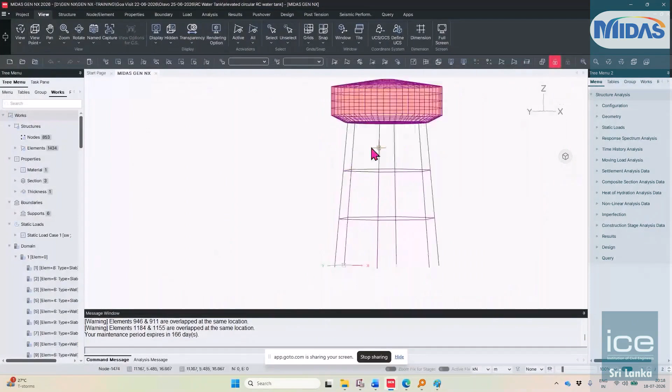How can MIDAS Gen be used to model a circular water tower foundation? So even in case of circular foundations, you can model it as a circular plate element. Let me open one water tank model. So when you are coming with circular tanks, we can create the model for circular tanks, and based upon that we can specify the rebar direction for the design. So you can model the circular bottom of that particular water tank, and again you can do the mesh design.

Now in the mesh design you have two options. Let's say we have the circular bottom of that particular tank. So in that circular bottom you can provide the reinforcement in both directions. These are two different patterns in the reinforcements of the circular slabs. One is radial and tangential. This is case one, where you will be having one radial reinforcement and the other one is the tangential reinforcement.

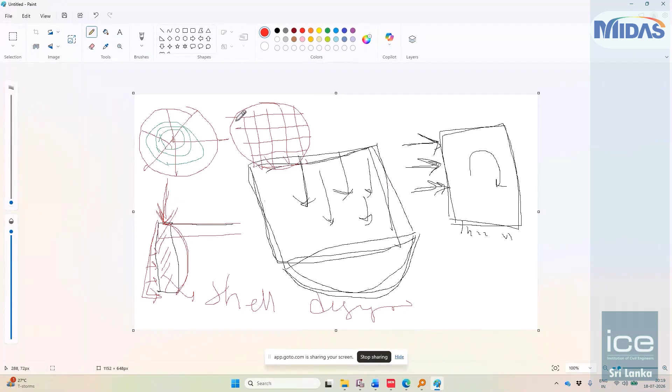And the second case is global x and y direction, which is perpendicular to each other. So this is the second case and this is the first case. Based upon the pattern that is required we can align our local axis, so that whenever you are doing the design the software will calculate the forces and moments with respect to the local axis and get the reinforcement required. So if you want perpendicular to each other, then the second case, and if it is radial and tangential, then the first case. Modeling will be the same - you need to make mesh elements, and according to that you need to do the design. So direction of reinforcement and local axis can be adjusted based upon the requirement.

To refresh, are all walls modeled as shells regardless of whether they serve as retaining walls or internal shear walls? And if not, why won't you do this? So if you want to model the shear walls as shell elements, you can model it as a shell element, and you can also do the design for that. But similar to that behavior, we already have a wall element where you can select it as a plate.

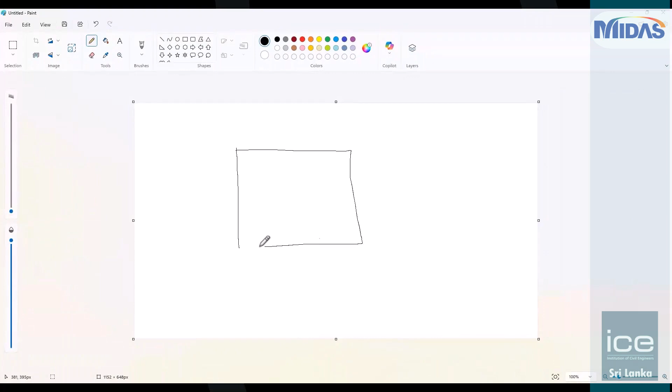Let me explain in the paint. So basically, you have an isolated foundation, and this is your column. Generally, when you model, if you see the elevation view, this is a plan, and this is the elevation view. And if you see the finite element modeling, you will be having a plate element like this and a line element like this. So here it is creating a stress concentration at this particular point. It is acting like nodal loads here. But in reality, your entire column is connected to the foundation, not just a single line.

So to simulate that your entire column is connected, this part of the footing will be rigid. So if you are designing any moment here, we consider the moment from the face of this particular column. And if you just model it as a single line, you will be getting some peak moment here. But if you see from the face of the column, the moment will be reduced drastically. So these peak moments are due to connection of the line elements to the plate elements.

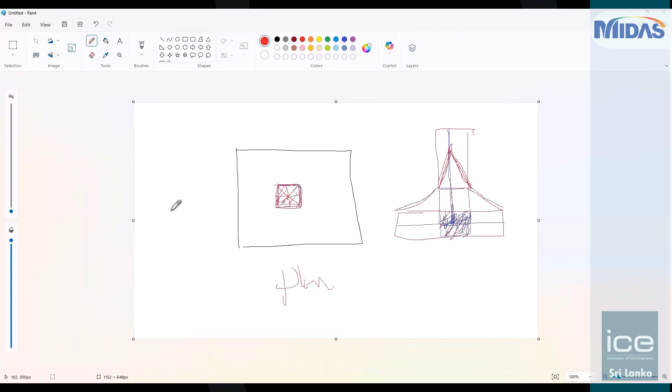But in reality, it is not a line, it is like solid. This part of the column is solid, which is completely behaving as rigid. So to simulate that, we use rigid links to connect the periphery nodes of that particular foundation. So if you are having nodes along the periphery of the column, it will connect with the rigid link. So instead of manually doing this rigid link, we use column capital in the software. It's not a drop panel, it is a column capital, which will automatically do this process for us so that you can overcome these peak moments in the foundation design. It's not a drop panel or pedestal, it's only just a column.

I am very interested to ask about the Taj Mahal, which is supported on deep well foundations near the Yamuna River. Can MIDAS Gen model the interaction between these foundation wells and the surrounding soil using springs, supports, or soil structure interaction?

How would this influence the modal periods and seismic response? Yes, you can handle well foundations in the software. It again depends upon the level of detailed response required. It can be done using line elements, or you can model the well foundations using solids or plates.

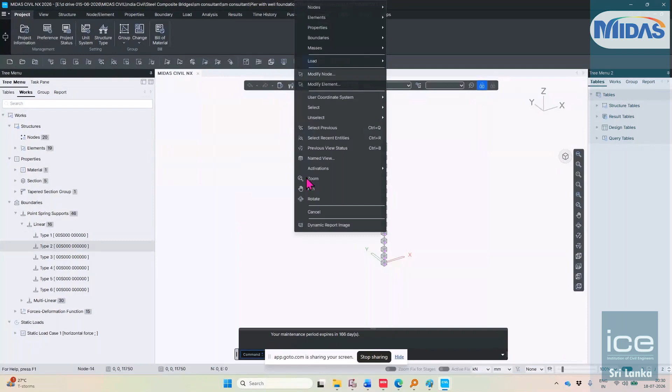So solid well foundations - these are the models for well foundations. We can model it as a line element for simplified analysis, and apply equivalent spring supports by considering the section properties. I can display the sections with some random color. So till this part I'm having the solid.

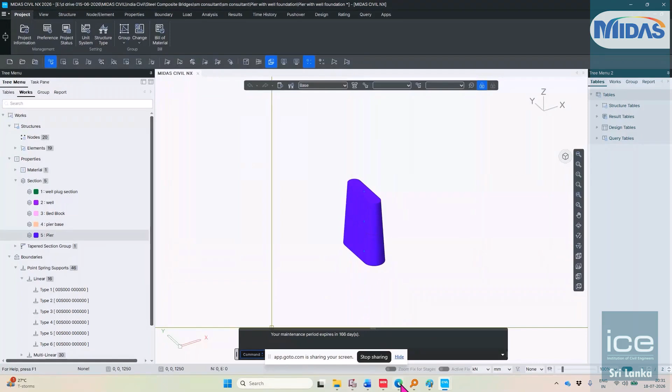Another option is you can model it as a solid element. You'll have the opening completely modeled as a solid element, then apply supports along the periphery face of these solid elements, and apply all the loads acting on the well, including nodal loads and wind. So you can model well foundations either as line, plate, or solid elements, based upon the detail of results required.